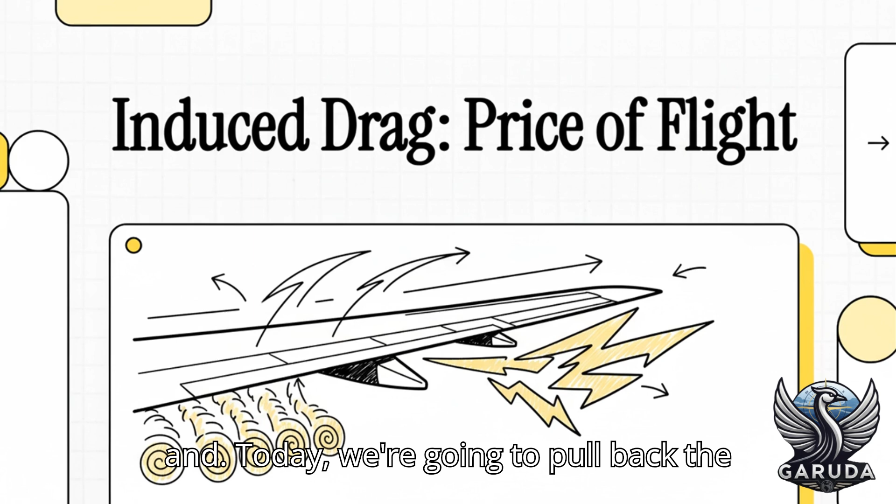You know, when you're looking out the window of a plane and you marvel at how this massive, heavy machine is just flying? Well, the magic behind that is a force called lift. But here's the wild part: the very force that holds the plane up in the sky also creates another force that's actively trying to hold it back. It's this crazy paradox, and today we're going to pull back the curtain on it. So what is this invisible price every aircraft has to fight against just for the privilege of staying airborne?

Well, it's called induced drag. And no, this isn't like the regular wind resistance you feel when you stick your hand out of a car window. This is something else entirely. It's an unavoidable, baked-in consequence of creating lift. You literally can't have one without the other. A really simple way to wrap your head around this is to think of it as the cost of doing business for a wing. You want lift, you gotta pay the price. And that price is induced drag.

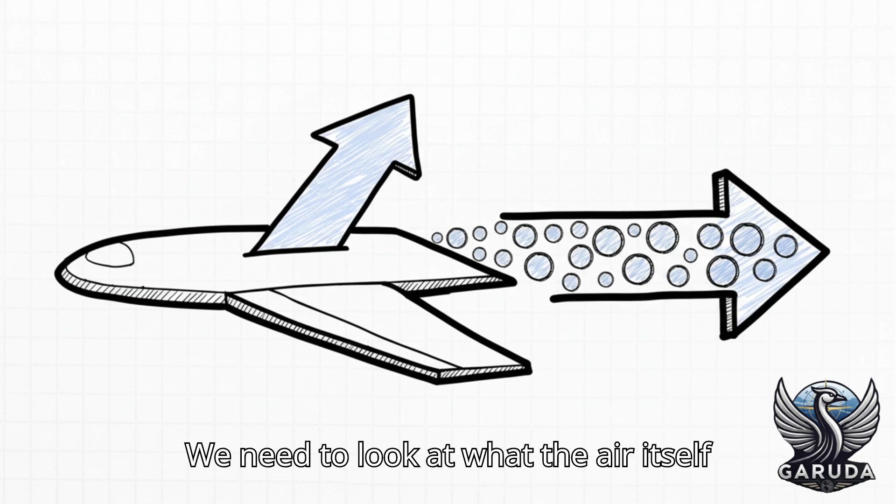But to really get it, we need to look at what the air itself is doing right at the tips of the wings. And that brings us to the real troublemakers here: wingtip vortices. These swirling, angry spirals of air are the direct cause of induced drag. Honestly, if you understand how these things are born, you've pretty much understood the whole concept.

So check this out. It all boils down to some super basic physics. High pressure always wants to move toward low pressure. An airplane wing works by creating high pressure underneath it and low pressure on top. Now, that high pressure air below is just desperate to get to the low pressure party on top. And the easiest escape route? It just spills right around the edge of the wingtip. When that happens, it creates this powerful, swirling vortex, kind of like a mini horizontal tornado trailing behind the plane.

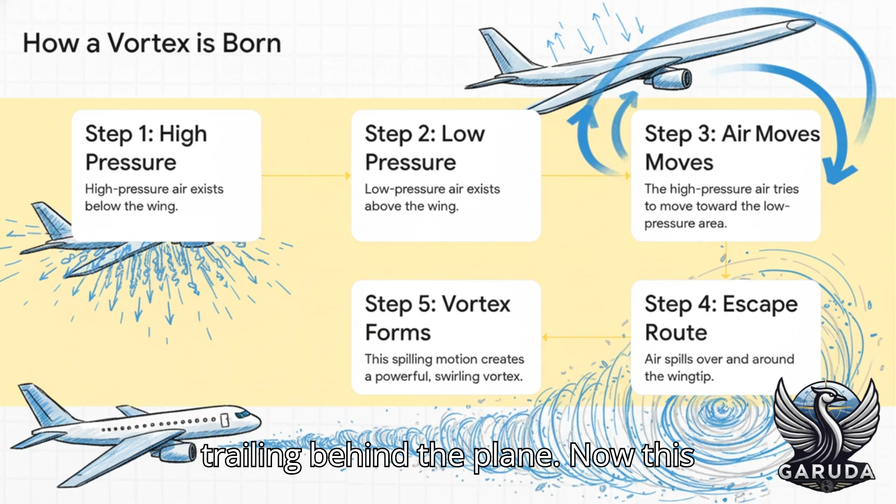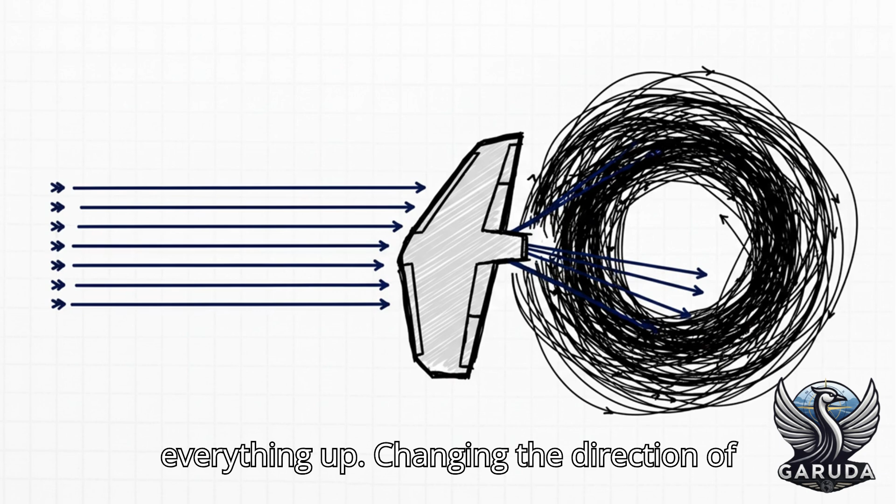Now, this vortex isn't just some harmless little swirl. Oh no, it's a powerful force that actually yanks the air downwards as it comes off the wing. We call this downwash. And this downwash messes everything up, changing the direction of the air that the wing is flying through. So because the air is now flowing slightly downwards, the wing has to tilt up a little bit more just to get the same amount of upward lift. But when it does that, the entire force of lift gets tilted slightly backward. And that tiny rearward component of the lift force, that is induced drag.

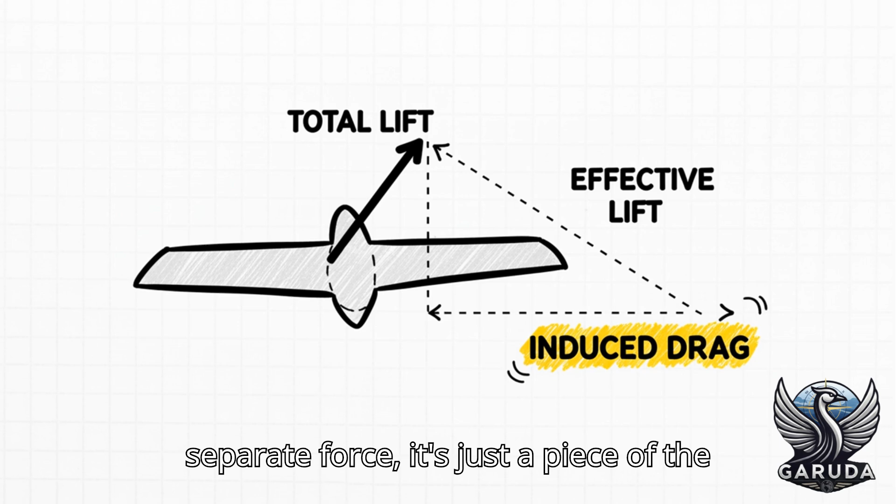See, it's not a totally separate force. It's just a piece of the lift vector pointing in the wrong direction, all because of those vortices.

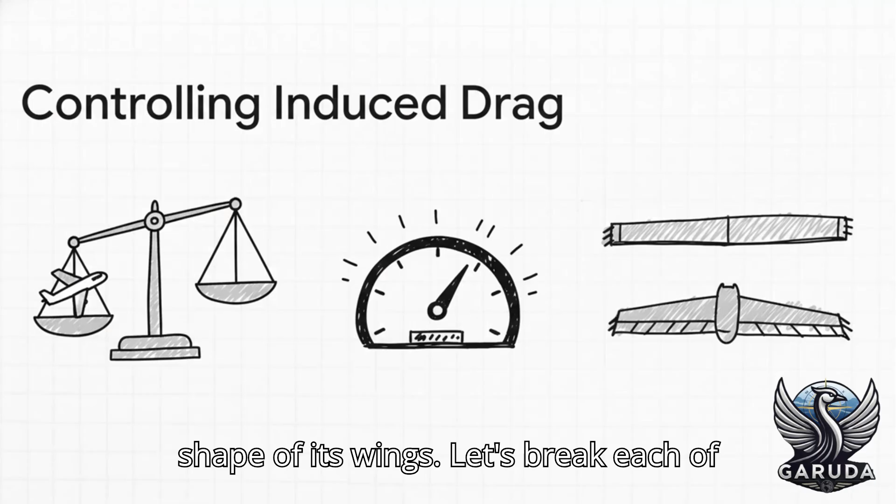Okay, so we know what it is and where it comes from. The next logical question is, how do you deal with it? Well, pilots and aerospace engineers basically have three main levers they can pull: the aircraft's speed, its weight, and the shape of its wings. Let's break each of these down, because they have a huge and sometimes really counterintuitive effect on just how much drag a plane has to fight.

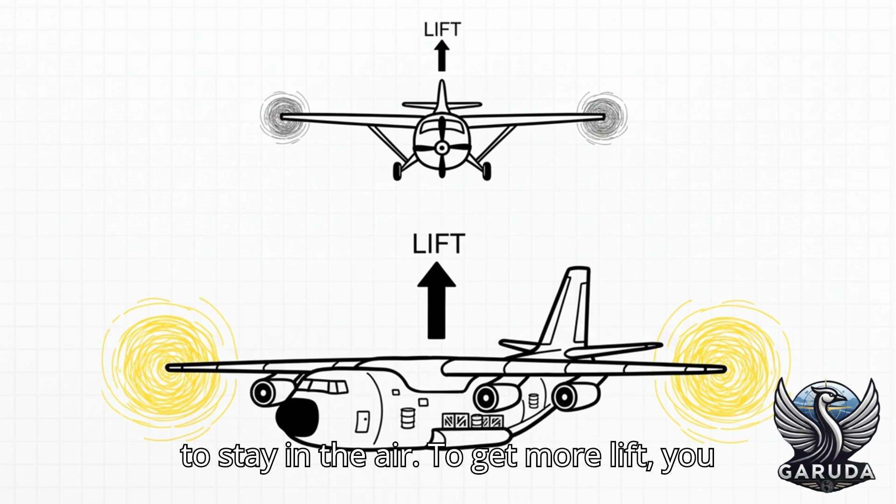All right, first up is weight. This one's pretty easy to grasp. The heavier the plane, the more lift it needs to stay in the air. To get more lift, you have to create a bigger pressure difference between the top and bottom of the wing. And a bigger pressure difference means, you guessed it, a stronger, nastier wingtip vortex. More vortex, more induced drag.

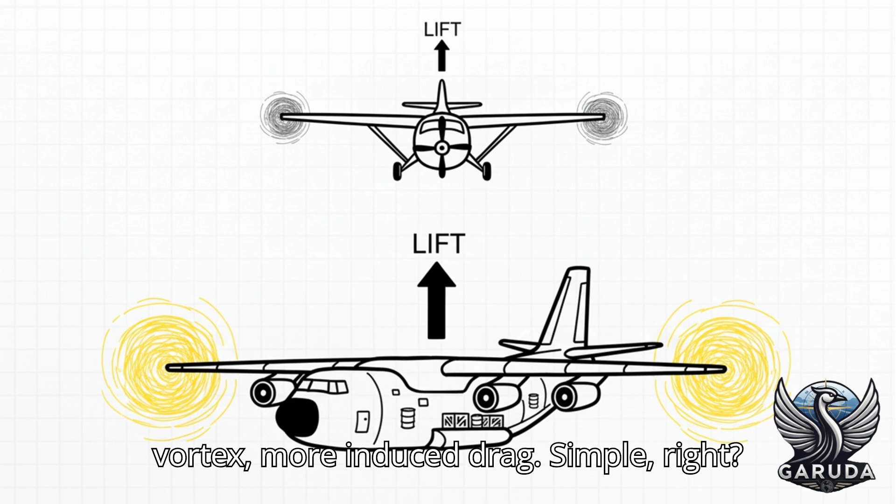Simple, right? Okay, pop quiz time. If a plane doubles its speed, does its induced drag go up or down? I mean, your gut probably tells you it goes up, right? More speed, more of everything, more drag. But the real answer is actually the complete opposite. So here's the logic: when a plane flies faster, way more air is rushing over the wings every second. This means the wings don't have to work nearly as hard to generate the same amount of lift. They can fly at a much lower angle of attack.

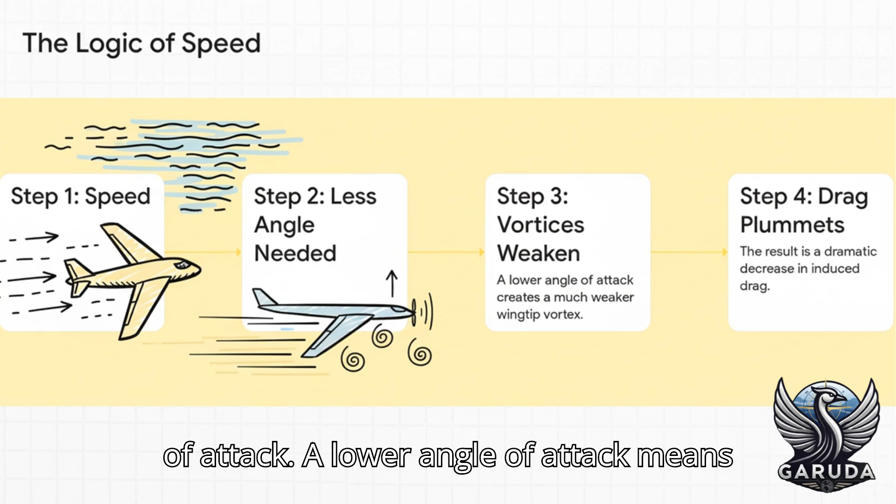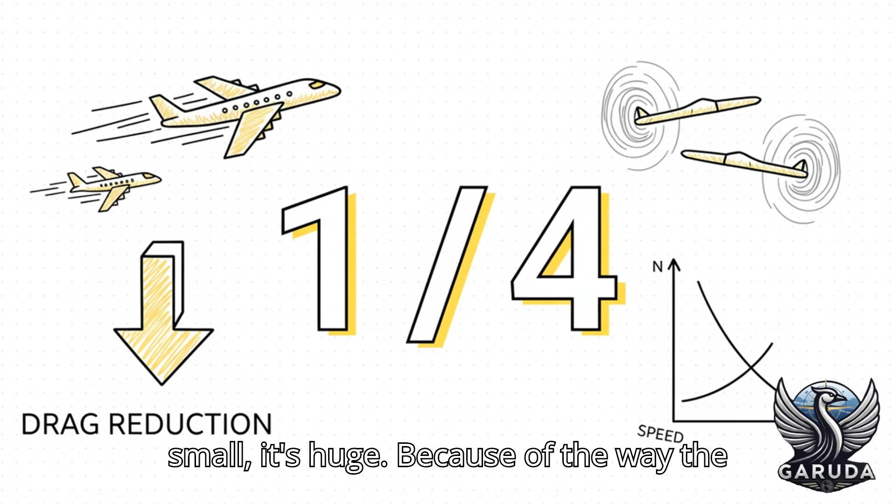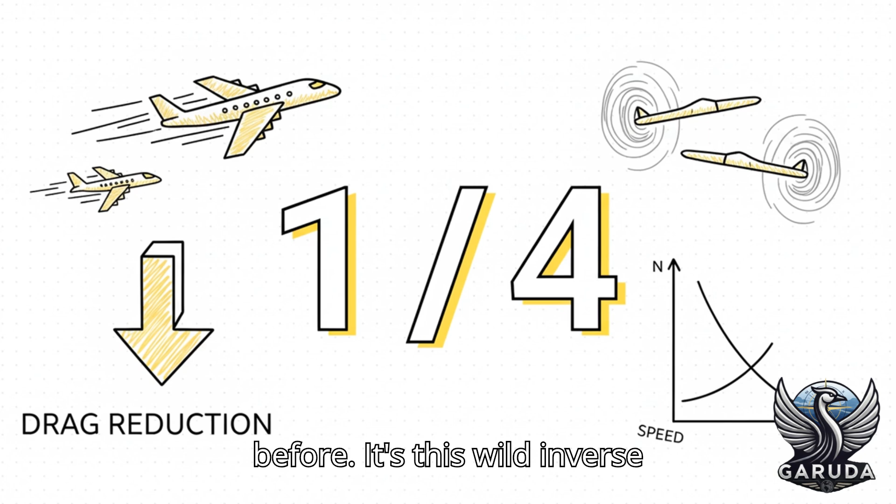A lower angle of attack means a smaller pressure difference, and that means much weaker vortices. Weaker vortices, less induced drag. It all clicks together, and the effect isn't small, it's huge. Because of the way the physics works out, if you double the speed, you actually cut the induced drag down to just 1/4 of what it was before. It's this wild inverse relationship that's absolutely fundamental to flying efficiently.

And that brings us to our third lever, the shape of the wing itself. Engineers call this aspect ratio. Don't let the term scare you. It's just a fancy way of describing if a wing is long and skinny, like on a glider, or short and stubby, like on a fighter jet.

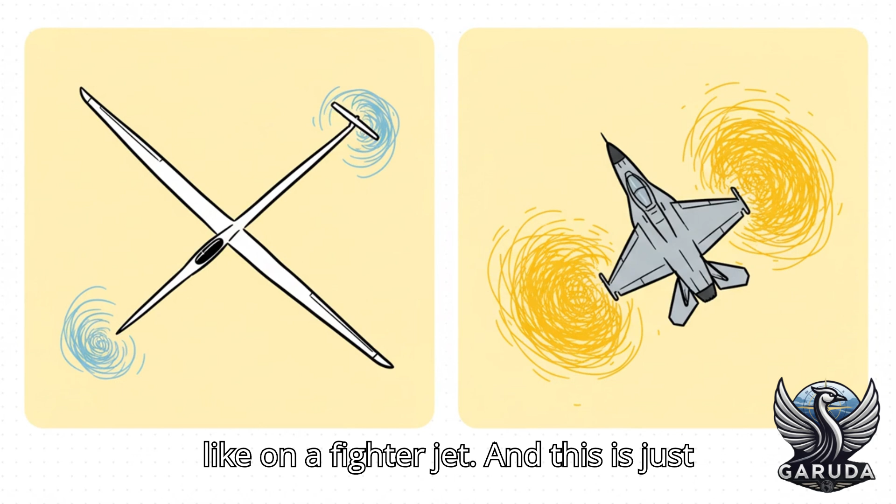This is a perfect example of a classic engineering trade-off. A long, thin, high aspect ratio wing is incredibly efficient. Why? Because the wingtip, where all the bad stuff happens, is a much smaller proportion of the total wing, so you get way less induced drag.

But a fighter jet needs to be incredibly agile. It needs to roll on a dime. That requires short, stubby wings, and the price they pay for that amazing maneuverability is a ton of induced drag.

So you might be thinking, why don't we just put long glider-like wings on every plane? Well, those super long wings are also super heavy. They create enormous bending stress where they connect to the fuselage. They're sluggish and slow to respond. And yeah, you also have to worry about the wingtips scraping the runway during a crosswind landing. It's always, always a compromise.

This is where things get really cool. Since you can't just make wings infinitely long, engineers have cooked up some absolutely brilliant ways to cheat the vortices and trick the air into behaving itself.

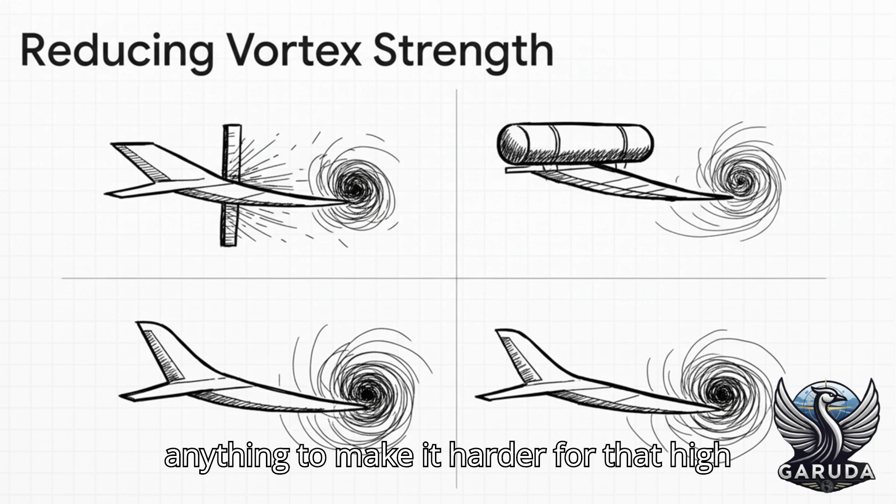They've tried all sorts of stuff over the years. They've put flat plates on the wingtips, used the fuel tanks themselves as barriers, and even just drooped or raised the wingtips. The goal's always the same: do something, anything, to make it harder for that high-pressure air to spill over the top. But by far the most successful, the most common solution, the one you've definitely seen a million times at the airport, is the winglet, that sharp-looking, upward curved bit at the very end of the wing.

But wait, it gets even cooler. This is the mind-blowing part. A really well-designed winglet doesn't just block the airflow. It's actually a tiny little wing in itself, and it's perfectly angled to interact with that swirling vortex in such a way that it actually generates a small amount of forward thrust. That's right, it creates negative drag.

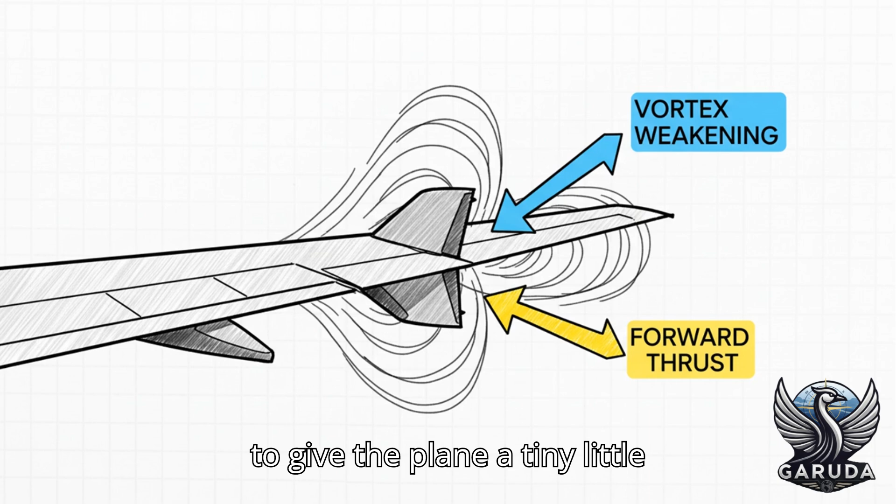So a winglet is doing two amazing things at once. First, it's a physical barrier that weakens the vortex. And second, it cleverly harnesses the energy that's already in that vortex and uses it to give the plane a tiny little push forward. It is just an incredibly elegant piece of engineering.

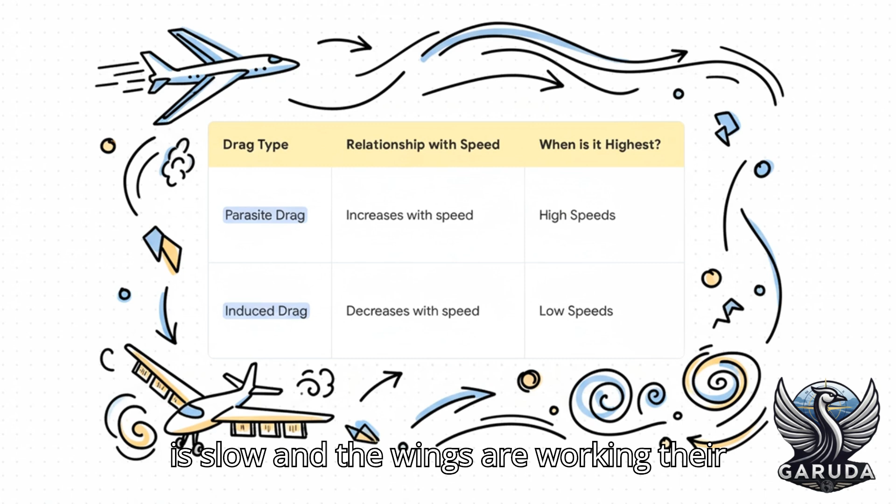So let's put it all together. The big thing to remember is that induced drag is a low-speed problem. It's at its absolute worst during takeoff and landing, when the plane is slow and the wings are working their hardest to create lift. Once you get up to cruising speed, another type of drag, called parasite drag, takes over as the bigger enemy. The whole game of efficient flight is managing the trade-off between these two.

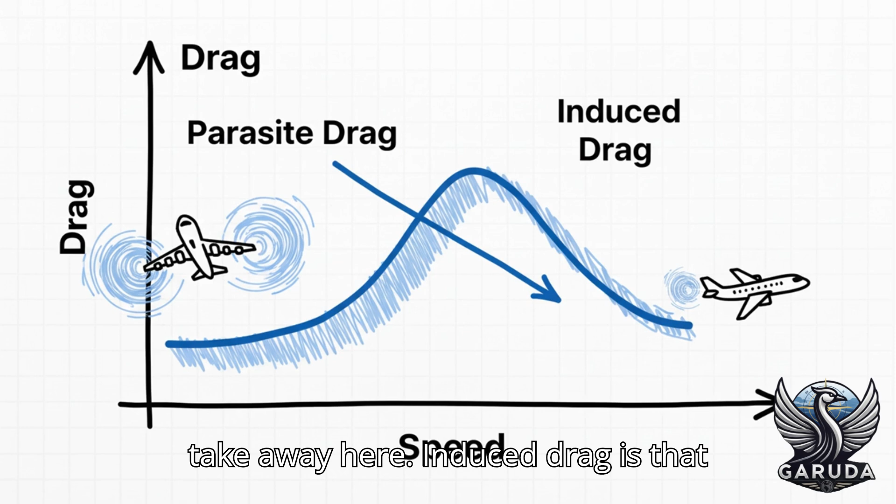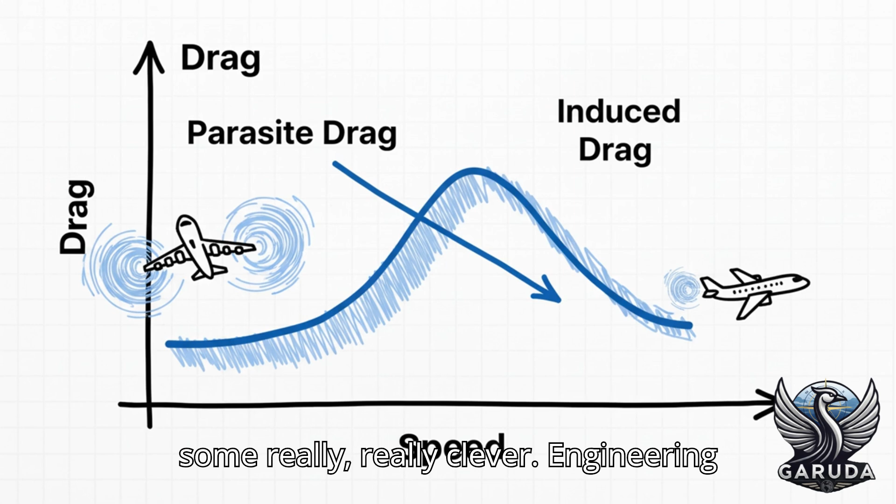And that really is the key takeaway here. Induced drag is that inescapable price you pay for lift. It's a low-speed menace, for sure, but through a deep understanding of aerodynamics and some really, really clever engineering, we've found ways to fight back and minimize its impact.

The story of induced drag is just a great reminder that in engineering, and maybe in life, there's really no such thing as a free lunch. Every solution creates a new set of trade-offs.

And that makes you think, doesn't it? What are the induced drags in the other amazing technologies we rely on every single day? What are the hidden costs of our smartphones, our electric cars, our AI? Something to chew on. Thanks for tuning in.